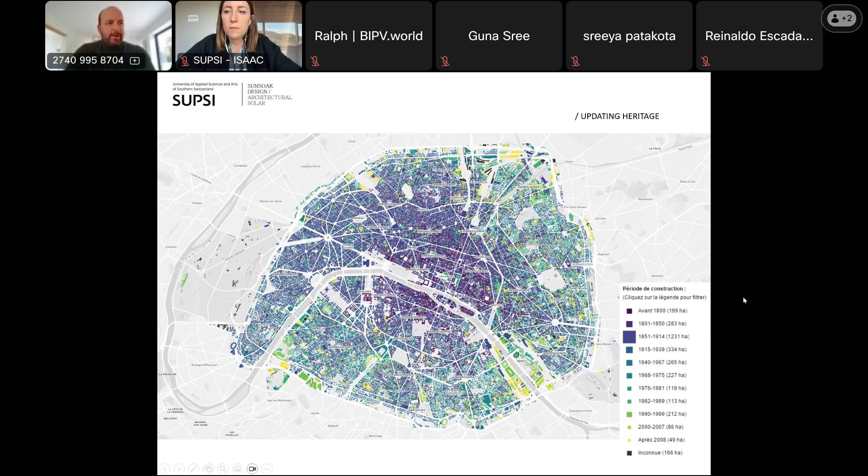When you look at the map of a typical European city, here for instance the city of Paris, you understand that the update we want to do of the existing city—because we don't want to dismantle and make only new buildings—means we work a lot on existing buildings, but many of them are very old, and sometimes even heritage buildings. If you see the map here, all that is light blue to dark blue is about a century old. But those projects are being updated as well.

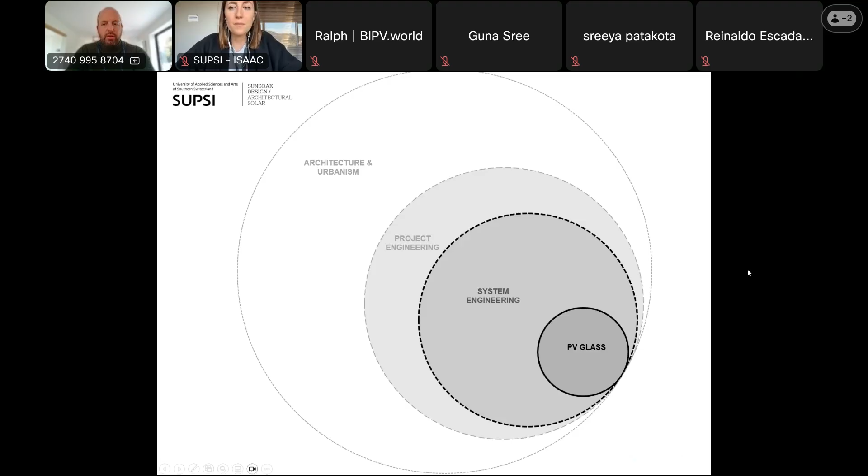Which is architecture and urbanism, project engineering, how to bring those to the site, how to build a crane that will build those structures on top of buildings, and the complete system engineering, which is much more than PV glass—we're talking about steelwork, DC cabling, sometimes curtain walling on the facade. So it's much more than PV glass, which probably takes just 20% of our time.

This is what I want to illustrate as systems. So we try to design not only the PV glass itself, but also how it's held and how it's talking with the facades or with the fifth facade, the roof that we will equip.

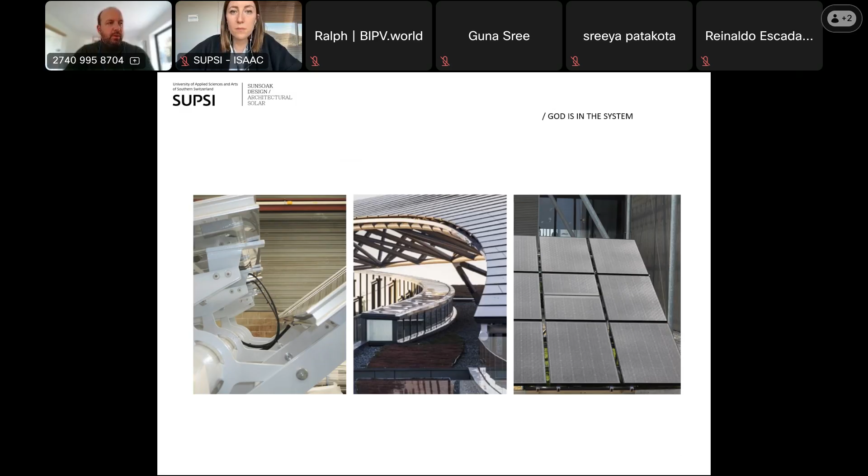And the last one is the French Ministry of Defense, which was of course very protected, and where no cleaning machine could go on top. So we built a scale-1 demonstrator showing that we could cut into a PV panel and make cleaning access via that gate. So, much more than just the PV.

What we receive from the architects on our table every month has been evolving these last 15 years. First, we were of course in application, and this is what we don't want anymore—we don't want a bluish PV panel on a terracotta roof. This is quite obvious now.

Then we switched to BIPV, which is really substitution. We found that the glass could be waterproof, could be a protection. So version 2.0 is really the attitude of giving an additional function to this PV, which is completely integrated into the skin of the building and having that function.

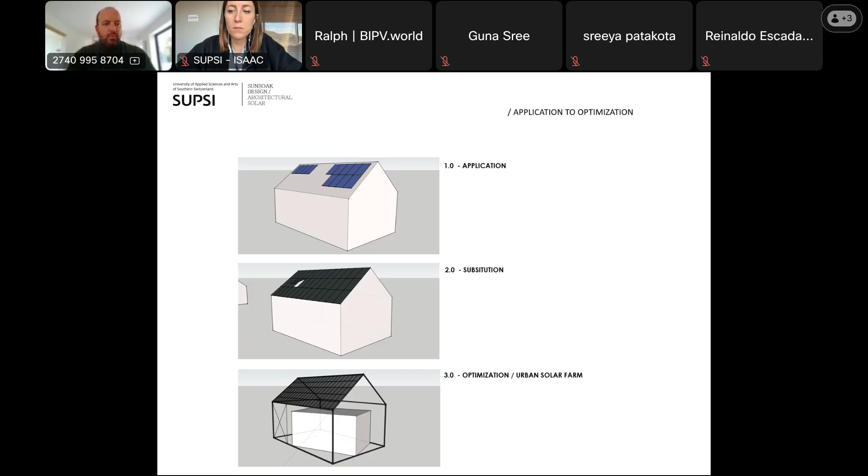And then the 3.0 that we encounter today are those optimized shapes, meaning the angle, the tilt, the azimuth has been chosen directly for the solar function. That's what we call urban solar farm, which to me is extremely interesting because it is assuming the solar quality of shape.

So this is the end for the pure theory. I think it's always better to talk about projects and real life projects. I will begin with what we call fifth facade - globally, it's the position of a roof, but that really looks like or is designed like a fifth facade.

The first project that I wanted to show you is a UNESCO context solar project, in the city of Bruges, in the north of Belgium. Completely in a UNESCO context, you cannot put any PV on any kind of roof. But the architects who had won the contest for the Bruges Museum for Arts decided to propose a project that was zero energy, and they did the opposite.

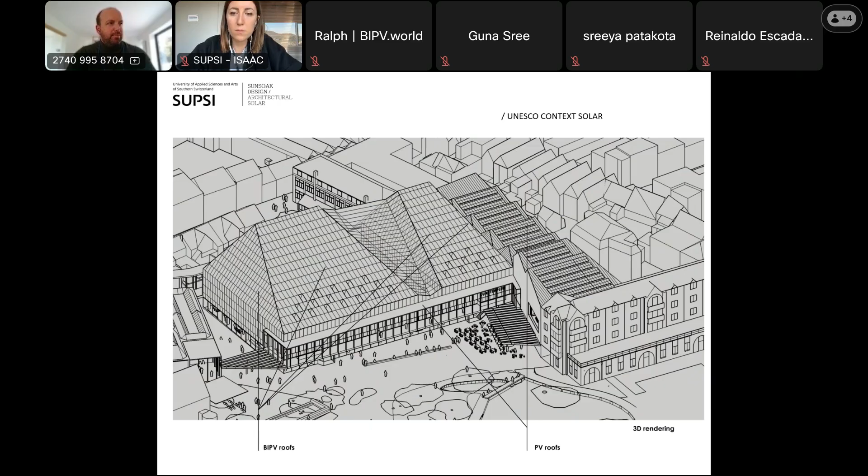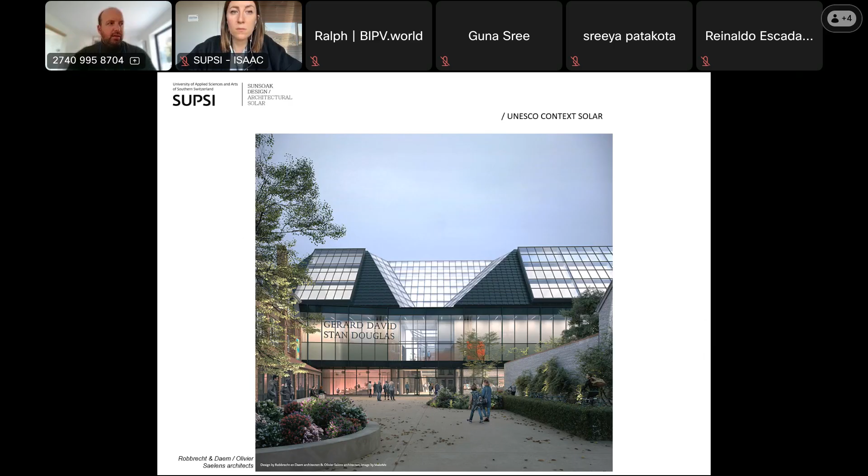They designed a shape that was completely solar, south-facing with a certain angle, a bit like a wing. The project is a mix of a new building with BIPV roofs and an existing building - that's the shed you see on the side where we put classic PV. But still, the aim was that we could not feel those roofs were made with PV material because of the UNESCO context. So the idea of Robbrecht and Daem architects was to have a tile that was dark green with a certain materiality, a 3D graining that would make it look like something else, like a skin.

As explained, when we did our irradiation simulation, it's a dream scenario because it's pure south with a perfect tilt. But the idea was different - the challenge was to have that shape that was a bit like a wavy glass, a bit like a snake skin, and with a dark green color.

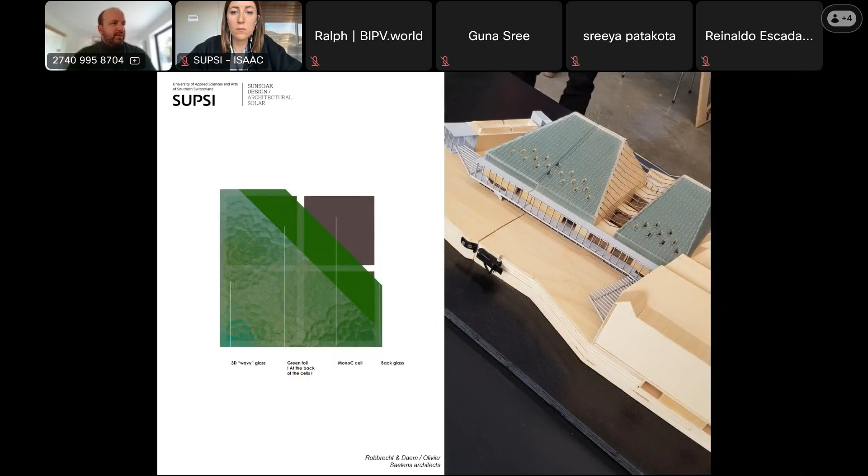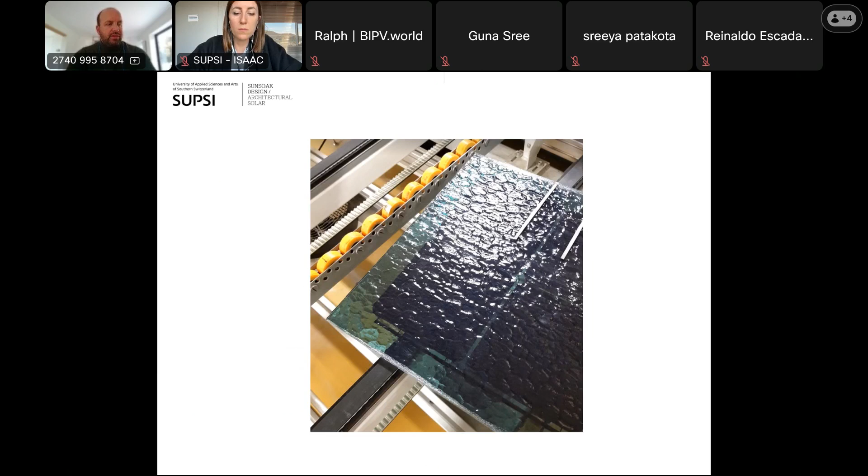At the very last moment of the contest, when only 2 teams were left, we quickly went to a producer of BIPV, and we managed to make a 400 millimeter sample that was used in the context of the architecture contest. And globally, this is what we had designed with our CAD modeler.

Because we wanted to be sure of that fixation. The glass was a challenge because it was a wavy glass, what we call cathedral glass, like ancient glazing. The color was a challenge because we didn't want it to lose output due to the color. And of course the system was a challenge because at some points you had unframed laminated glazing with 4 layers of glass at the same point. So it was very important to study it and see how external elements like wind were operating.

So this is the result. More than the fifth facade, we also equipped the lateral roofs and also the pure facades, the vertical ones. I think we are not too far from what we expected. At the end of the day, I think the performance is perhaps more about the detailing - that aluminum extrusion making possible the overlap, quadruple overlap on the glass - than the glass itself.

I think we see both in the architectural language, and that's what we are very proud of. We spent a lot more time on the detail than on the glass itself.

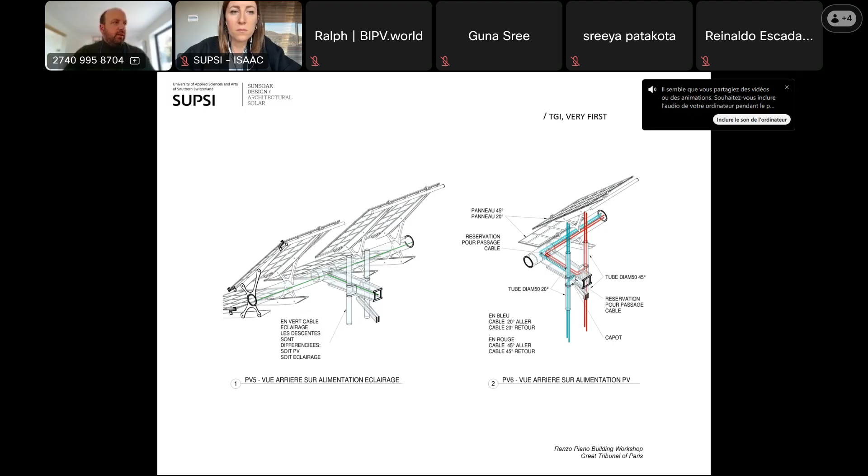And the system that we have now is that the davit, the system used for cleaning the facade, goes at the back of that system, and you can rotate the lower PV to make it accessible and get the junction boxes.

So that was not so easy, but it's always a great challenge and great pleasure to work with such architects. At some point, you have to announce that glass at 160 meters high will not be held frameless with 4 hooks. That's not possible. So we had to ask for a peripheral aluminum frame, and that was a piece of discussion with the architect.

But at the end of the day, we found a great design for that framing, and I know the architects are very happy with that final design. It is completely part now of the identity of that project, because if you take the peripheral highway in Paris at night, you will see that only the PV structure is backlit by an LED installation at night.

And I think, yeah, it's very light. So I think it's important to also illustrate that you don't always need tinted glazing or strange shapes or curved things to make something optimum. Here, I think again, it's the detail itself that is visible more than the glass itself.

And during the work site, we had to send some alpinists to try to sort electrical problems. That's what we don't want during the lifetime of the project.

Lots of time we hear that we are talking about optimizers on facades and a lot of electronic devices directly on high buildings. That's really something that we prefer not to do. We want to bring all the intelligence of such a project into an accessible place, like a technical room inside the building.

And we prefer to work with a stringing layout more than bringing intelligence directly on the PV glass itself, because it means you bring an additional risk on the facade, and maintenance at 160 meters high is not the same price as just sending a technician to an inverter room. So that's very important for us, the maintenance.

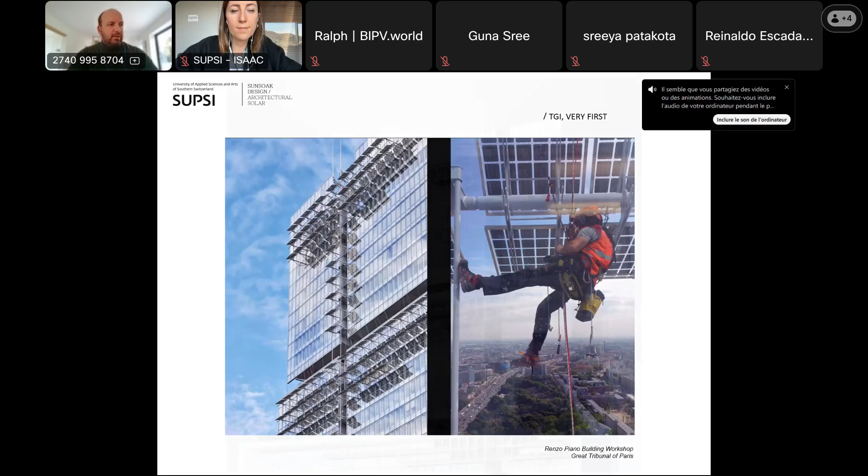And this is how it looks delivered.

So another project is World Trade Center. I called it top of the class because in Brussels, that small tower is really an example, not solar-wise, but on all topics of what the Belgian government wants us to do as architects with existing buildings, and how to update the city for 2050 objectives.

More than the PV glass, these are examples of the PV glazing that we have proposed and finally installed on the tower. The global project was really ambitious because these towers were existing from the 70s, and the architects decided to remove all the facades but keep the concrete core of the building.

So the dismantling of that building was not 100%, it was probably 70%. And by reusing the slabs and the core of the building, they saved a lot of equivalent CO2. So the whole building was really ambitious.

And on our side, we were asked to put some shadow profiles, BIPV, all around the new facades, and we were working for the facade engineering team.

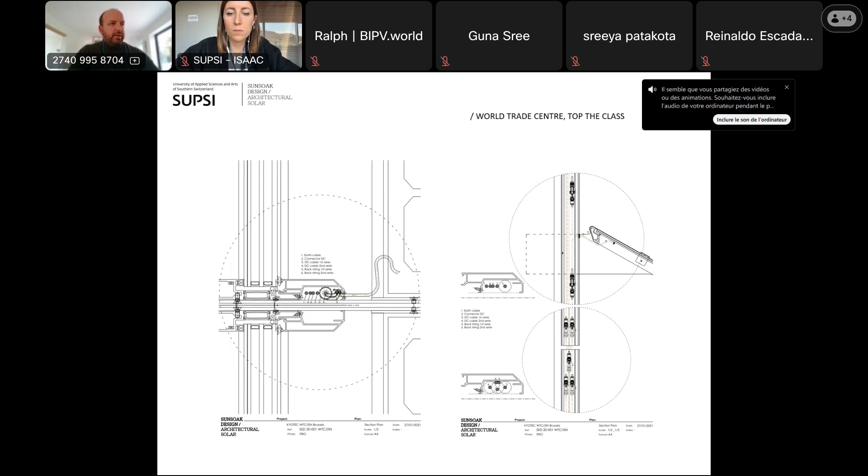The big challenge was to make everything invisible. So here you see a typical section that we had produced with Kyotec facade, where all the DC cabling goes into a vertical extruded profile that takes exactly the maximum diameter of the MC4 connector. So we are very proud that today those shadow profiles, you can identify their solar aspects due to the PV cell, but you can't see any kind of cabling, nowhere. It's all included in the facade profile. And that was the biggest part of the work.

This is how it looks like today. At some point of the project, they added another PV part, which is what you see on the right - the greenhouse. It's a glass box with a park inside it that is accessible to the public, a public space offered by the project to the community.

The thing is it's a lot lower than the World Trade Center tower, so it is completely under shadow. We had to discuss a lot with the owner, asking if that horizontal roof was really something we were willing to equip, but they really wanted to have a BIPV at that place. What we found after some simulation is that actually the irradiation level was not so bad, and that's just due to the mirroring of the other towers next to it. So even though it's a bit northern, we have at some point a good curve just linked to the mirroring effect of the other curtain walling next to the project.

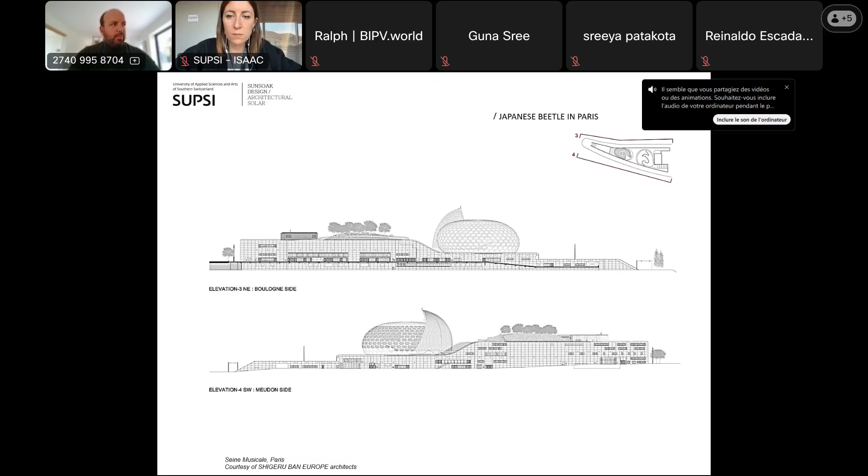It is a park mixing art and vegetation. But he also designed a kind of egg, and it is in that egg that the main concert hall is located - you can see it in the sections and plans. The whole structure is a bit the signature of Shigeru Ban Europe - it's a mesh of wood, but he also wanted to have that sail literally physically turning around the project, which is a mix of glass and PV.

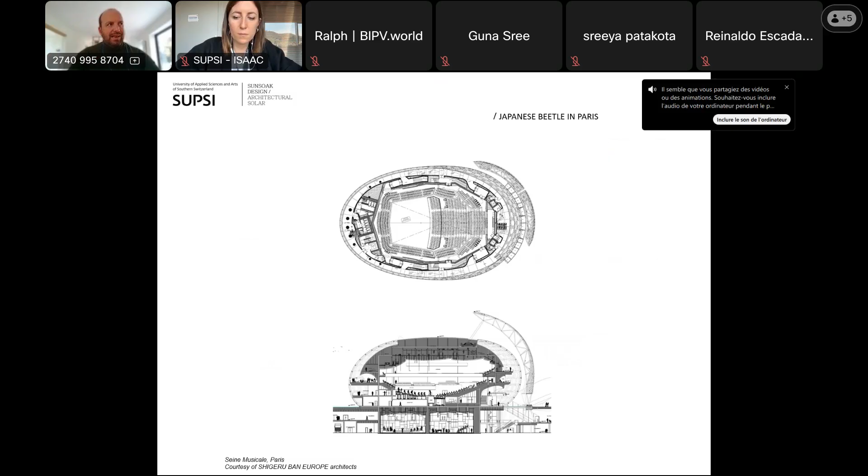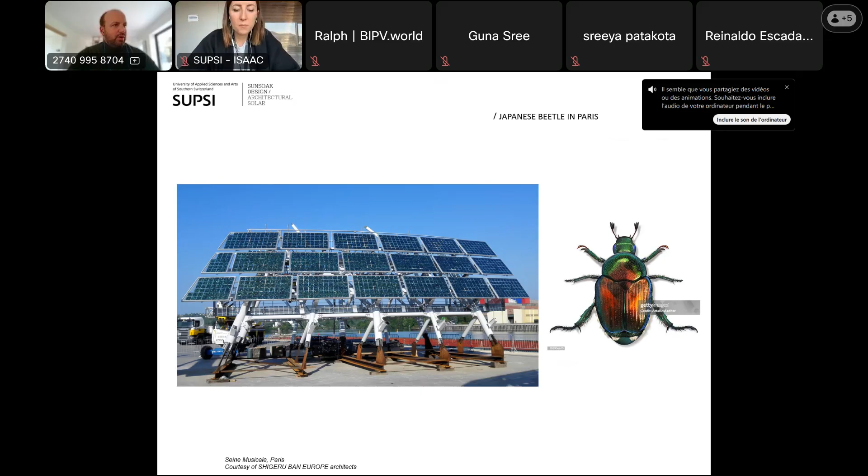He wanted to have a Japanese beetle effect. At first we didn't really understand what the architect meant by that, but after showing us the animal, we understood that the Japanese beetle has some very uncommon colors - a bit like iridescent colors - and that is why the architect wanted that sparkling green, very typical of polycrystalline PV, which in the end we were able to provide.

And of course that sail also participates in the internal comfort because it follows the sun. But we are completely conscious that it is also a piece of art and a demonstrator, as well as a solar device.

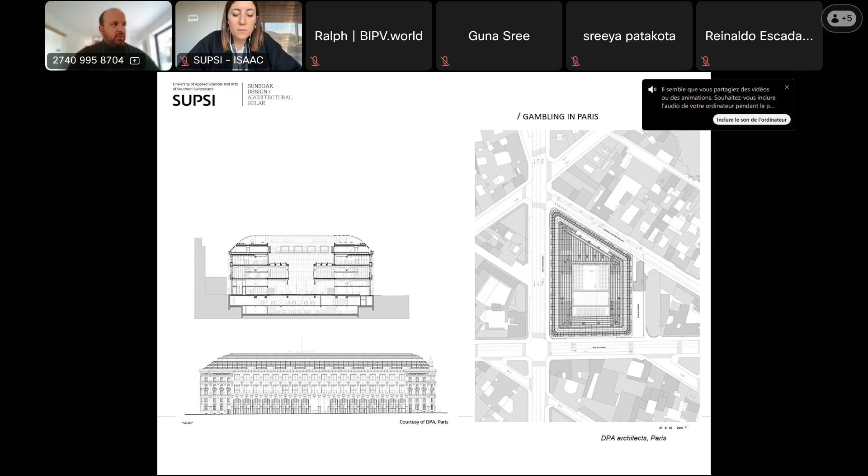Another project not so far is the Dominique Perrault Poste du Louvre. I call it 'Gambling in Paris' because the architect said during the contest, while they were still in the architectural competition, that he would go higher than the Haussmannian Code in Paris. That Haussmannian Code, the urbanism of Paris giving maximum height for the roof, is really something you can't discuss - it's compulsory to follow. But he said, I'm not doing any roof, I'm making a solar machine. And that's at the end of the day how he won the project.

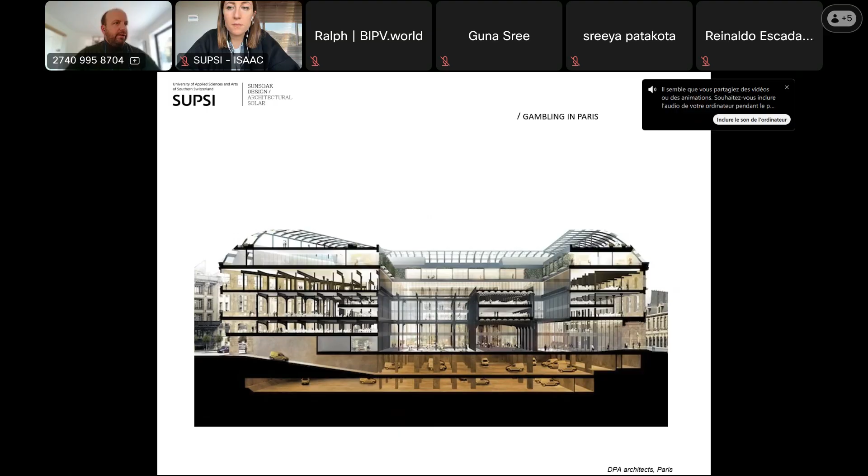And he asked Sunsoak how to define that walk around.

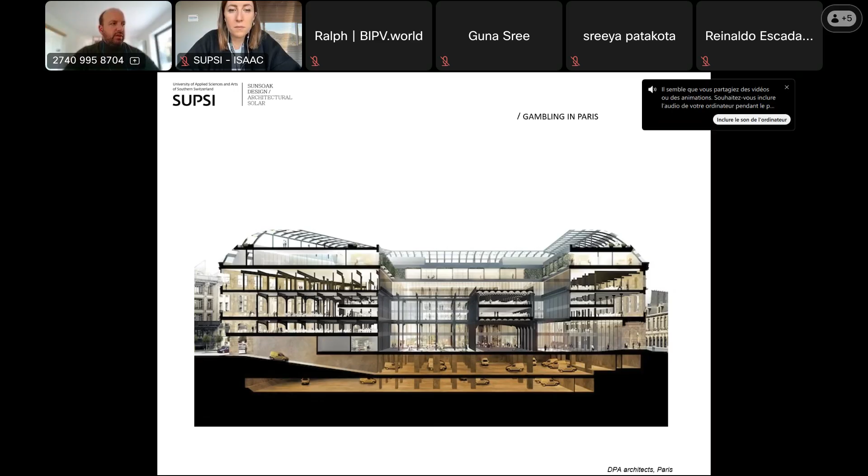So it is really a place that you can use for walking on top of a hotel. The idea was to have both a park and a PV collector on top of that heritage-protected building, because it's very well known by the Parisian people. That's the head of the post in France, open 24 hours a day. That was the first idea of the project, to really have a park and something walkable plus the solar function.

I think it's interesting because we experience a lot of pressure on the roof of recent projects, where we want to have both HVAC, greening, and solar collection. Here, by lifting it up and putting people under that canopy, we could do both. We could do a bit of greening and solar collection.

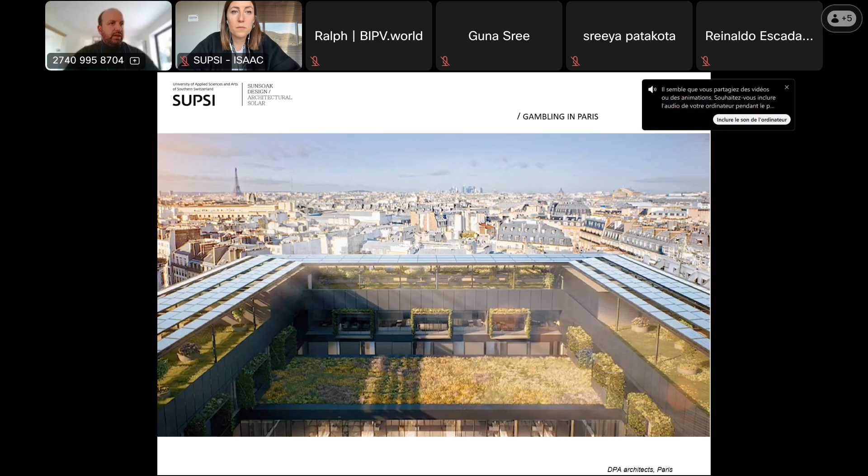And this is how it is today. I know they built a very nice rooftop bar, also now very well known in Paris. But you are literally surrounded by those PV elements, which are not completely closed. It's 50% opening, and that's what contributes to the lightness, the light effect of the whole structure. And you can see a very nice view of Notre Dame, and on the other side the Eiffel Tower.

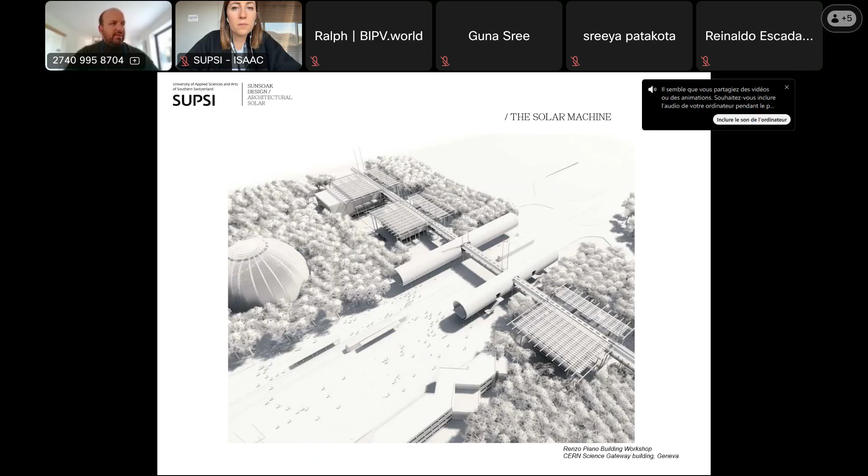Probably that's the typical solar machine. The first time we used that word was working with Renzo Piano on the CERN Science Gateway building in Geneva. That's the very well-known CERN complex, the particle accelerator well-known in Switzerland. But because that site is really closed and not accessible to the public, CERN asked the architects to create a science gateway building, meaning a hub where students and people willing to visit could have access and explanation on the process of CERN.

So it has been materialized by 3 pavilions, and those 3 pavilions have received on top the solar collector, which is again completely separated on its own structure and designed as a different piece of architecture than the building underneath.

And again, the solar is very repetitive. It is rectangular blocks. We only gave it a white fritting on the back of the glass, because that's an architecture that has to be seen from the public space, from the back of the glass. But otherwise, it's just a rectangle with 20 millimeters of gap between the cells.

But the system on how to hold it and how to make it elegant, to me, is the real performance. So you see that now with just that small white fritting at the back of the cell, we have a completely different perception of the global project, because the white element at the back of the cell is the same white element as the structure and as the cladding.

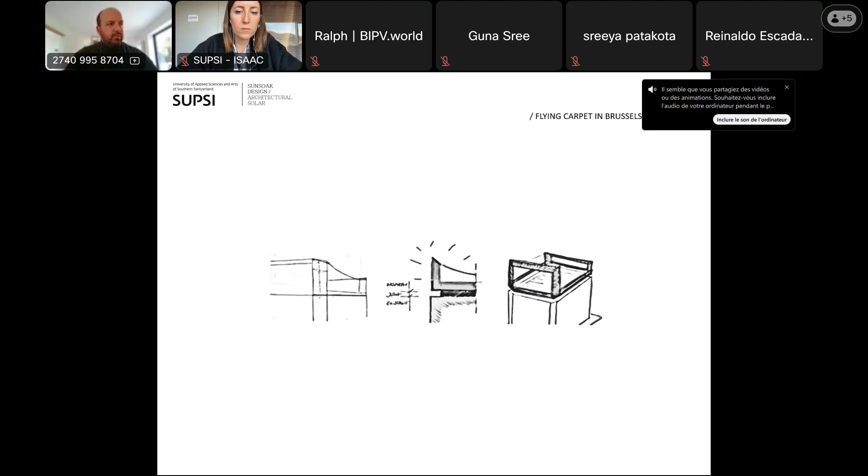Our proposal and how we won the contest was to put an additional crown, really a different object on top of the building with an inverted slope, because the main facade is north facing, so we could not make a vertical facade or even something like a bubble on top of that building, since the orientation was not proper.

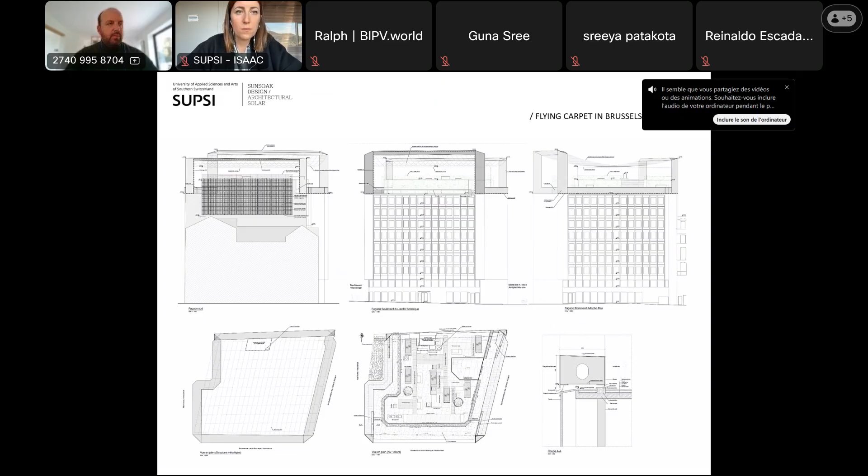So we had to invert the curve, making it south facing, and also equipped vertically a blind wall that is completely south facing. That's the project at the permitting phase, and the challenge was really important in terms of structural engineering, because we brought a lot of extra loads on the four corners of the building, and we wanted to give the impression that the PV was flying between those two structural elements, the front and the back one.

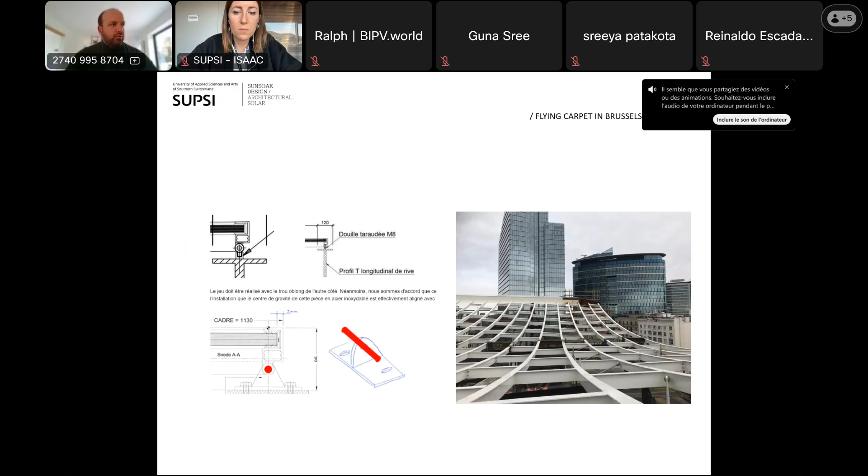We used a structure that is in pure tension, really working as a cable, and slightly curved. The detail of the steelwork and how to put the glass on top of something slightly curved like this was really the number one challenge on that project. The company who delivered this worked a lot with us to improve the framing and that rotating detail we had to use.

Bringing such a huge structure into the very center of Brussels, just a few meters away from the Grand Place, was a huge challenge, and the whole structure was delivered and mounted in only one night, because we had only one night to cut off the avenue next to the building. And this is how it looks now.

I'm very proud of that project also, because it's one of our signatures, a project directly from us as architects from Sunsoak, and I think it's one of the projects that people understand directly because of that angle that is south facing. It is very clear that we're not looking at a canopy or something non-active, because otherwise it would have a completely different shape, and that shape is really completely solar oriented.

Probably the best thing about the project is what you see a bit on the left, the shadow brought onto the steel, the white steel plates. They have a lot of shadow games that change with the seasons. We also really wanted to leave an open gap between the existing building and our intervention, so it's completely understandable that we're talking about something new.

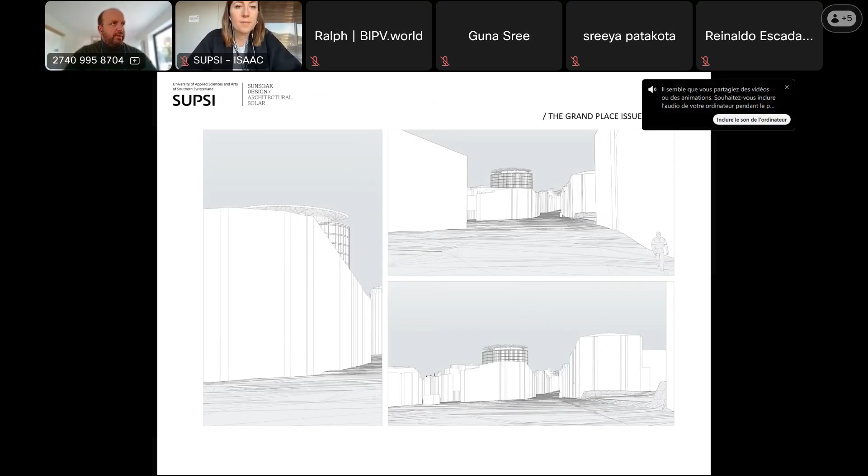So that's what we are now, and we are very happy now to work on other projects, like this structure that is still under tendering, also in the center of Brussels, with the challenge that it's the only recent architecture that will be visible from the Grand Place. We are very proud to have received approval from the City Council about that, and this will be our near future for the months to come.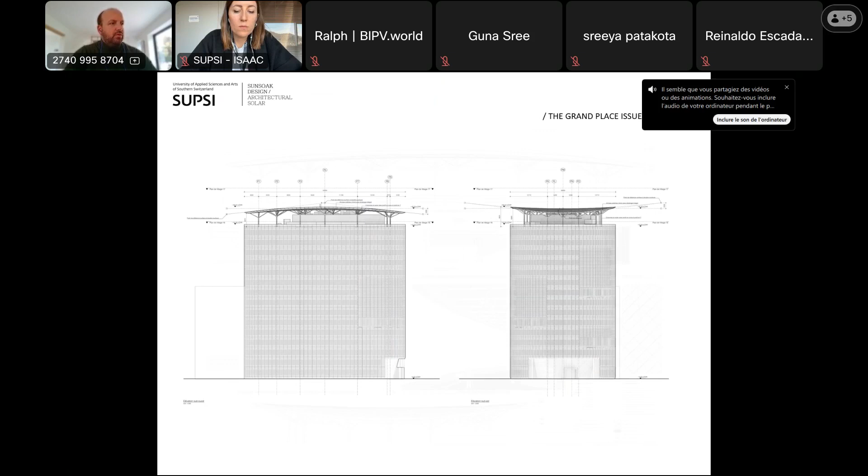It's to build that kind of small forest on top of an existing building, again to operate the update of the city of Brussels. Voilà, that's it for me.

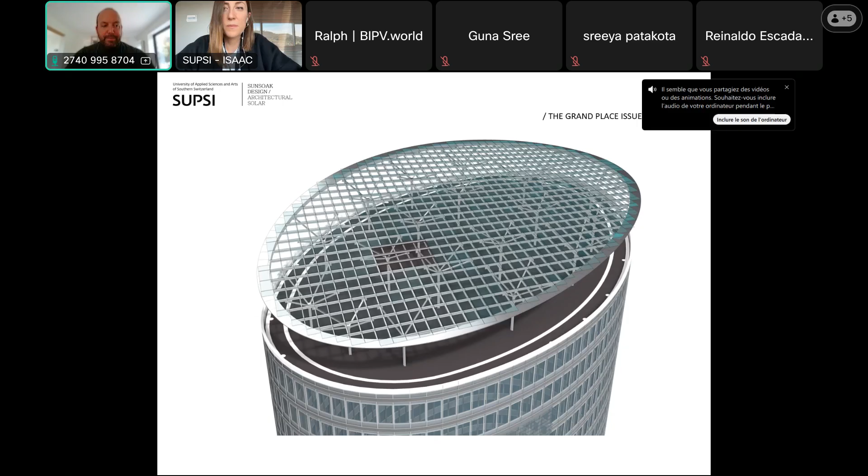does not receive the projects in the pre-design phase systematically. Sometimes we arrive very late on the project, and that's the project we fear the most, because most of the design decisions are already taken, and sometimes the building permits are already granted. So we arrive more like technicians, and we are just asked to put a golden color somewhere, and that's it. And that's where sometimes the mistake happens, because you end up with a zone that is vertical, with trees on top, inside a building, so you have a lot of shadows, and people are completely concentrated on the RAL color of the PV elements.

But to me, that's not a good attitude, because it's first form finding that you have to do, to understand if it is or is not suitable for solar. And then, only if you could answer yes - that face is irradiated enough, you don't have any shadow, and it is the right orientation and tilt for what you need to do with that solar, with the producing curve - then afterwards you can give it a color. But yeah, some projects were not so good due to that approach, which was a bit of a mismatch in how a good PV project should happen.